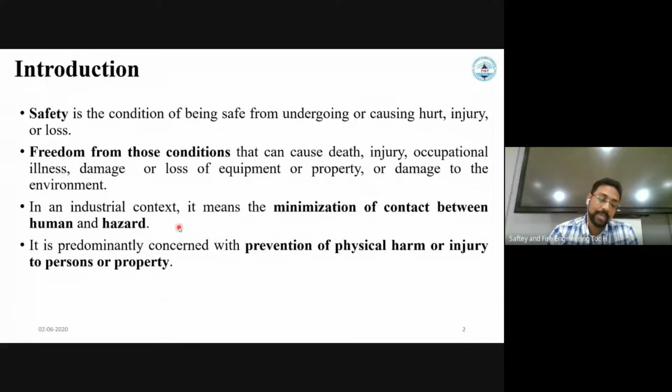We can go to the history of safety. The history of safety is very old. We have an Indian origin. Our Vedas, especially Ramayana, Mahabharata, Kautilya's Arthashastra, provide valuable advice on industrial matters. Especially the basic concept of safety for human protection was explained in the Rigveda.

It is written here, Puman Pumamsu Paripadu Vishwat. It is a Sanskrit phrase. The meaning is, let man protect man everywhere in the world. It is also said, Dharmo Rakshati Rakshitah. It is also Sanskrit. The meaning is, Dharma, a divine force to govern all people by self-discipline, will protect those who protect themselves.

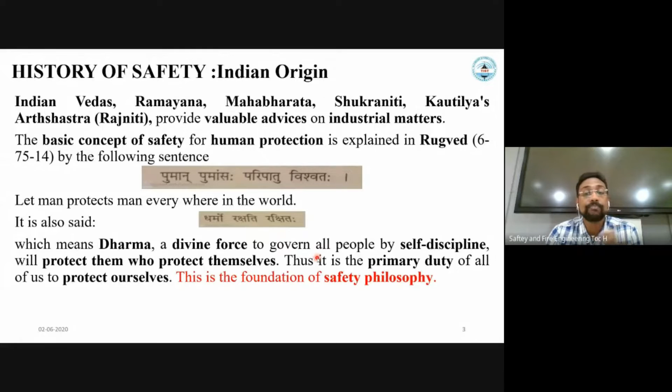So this is the primary duty of all of us, to protect ourselves. As human beings, we have to take care of all people, all fellow beings. Fellow beings we have to protect. This is the foundation of safety philosophy.

Now, one Upanishad says, Sarve Bhavantu Sukhinah Sarve Santu Niramayah Sarve Bhadrani Pashyantu Ma Kashchid Duhkhabhag Bhavet. The meaning is, let all be happy and healthy. Let all achieve welfare and no one get unhappiness.

You know, the happiest country in the world, according to the United Nations Human Development Index, is Finland. If you take the HDI ranking, Finland, Denmark, Norway, Iceland, Netherlands, Switzerland, Sweden, New Zealand, Austria, Australia, these are the countries ranked up to 10th or 15th in the HDI ranking. These are the countries where the people are very happy.

What are the factors which affect the happiness of the people? The standard of living is one factor. Environmental pollution is a factor. Education is another factor. And a safe working place and safe environment is another factor. So happiness cannot be achieved without safety and good health. So it is of prime importance. Therefore, the above Sanskrit stanza speaks about safety, health, and welfare of all, which is also the modern concept of all safety law.

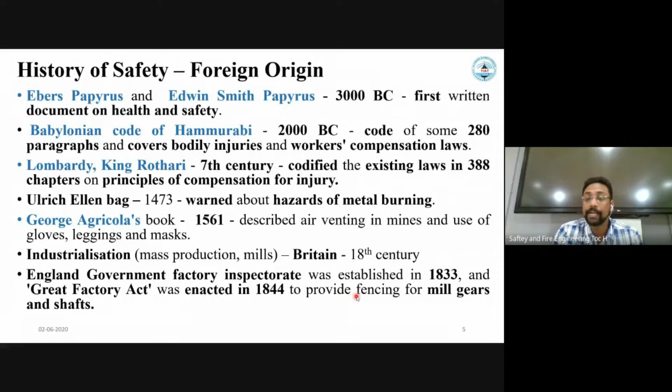And we know industrialization in Great Britain happened in the 18th century. That is actually the beginning of the safety culture, safety law, and safety inspectorate. The England government factory inspectorate was established in 1833. After so many industries started, more accidents happened. So people gave more importance to safety to protect people, the environment, and the health of people. The Great Factory Act was enacted in 1844 to provide fencing for mill gears and shafts.

Again, George Stephenson, known for the steam locomotive, suggested the use of the steam whistle for locomotives. He contributed this in 1833. And the National Board of Fire Underwriters was organized in 1866. In 1900, the first safety periodical, named Safety Engineering, was published.

In 1913, the Safety Council was founded in the USA. In 1914, during the First World War, the first Safety of Life at Sea convention was held in London. And later on, in 1919, the ILO was established, at Geneva in 1921. Later on, the ILO contributed a lot to safety.

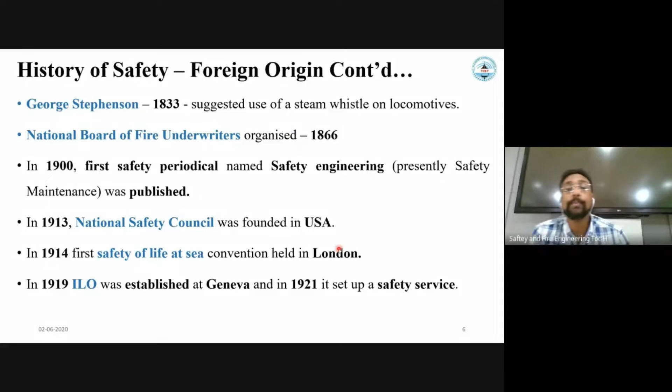Now we'll come to industrial accidents. What are the major industrial accidents that happened in the world?

The International Labour Organization estimates 2.3 million women and men around the world succumb to work-related accidents or diseases every year, with around 6,000 deaths every single day. It's not a small number, it's a big number worldwide. There were around 340 million occupational accidents and 160 million victims of work-related illness annually.

You can see the picture. These are some of the worst industrial disasters ever to happen in the world. From these disasters we learned a lot about safety. When an accident happens, everybody thinks about safety - oh, if safety was there, this accident could have been avoided.

The first one is the Oppau explosion, which occurred in 1921 when a tower of around 4,500 tons of a mixture of ammonium sulfate and ammonium nitrate fertilizer exploded at a plant owned by BASF. BASF is one of the largest petrochemical companies now, also one of the largest in Germany. That explosion killed around 600 people and more than 2,000 were injured.

Now come to the Rana Plaza explosion. That was in Dhaka, Bangladesh, in 2013. An 8-story commercial building called Rana Plaza collapsed. Total deaths were around 1,200 people, with approximately 2,500 injured. It was considered the deadliest structural failure accident in modern human history, and the deadliest garment factory disaster in history.

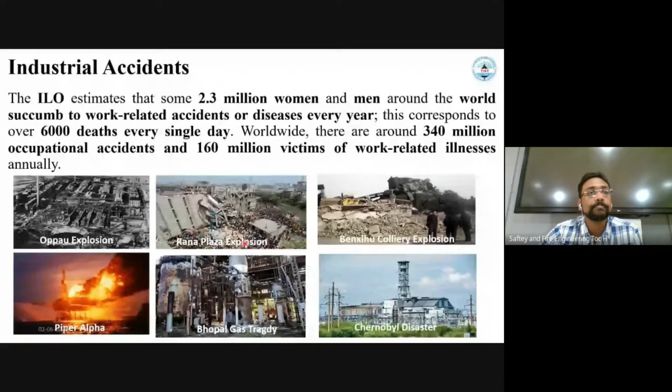Now we'll see some other industrial disasters I have not listed, especially the Flixborough disaster, Seveso disaster, Texas City refinery explosion, Three Mile Island, Jaipur oil disaster, and recently in India, the Visakhapatnam LG Polymers chemical plant gas leakage at Venkatapuram. These are other eye-opening incidents or accidents that happened.

Now we'll familiarize ourselves with some safety terms. What do you mean by accident? We never want there to be an accident. It is an undesired, unplanned event which may cause personal injury, damage to property or equipment, or loss of output, or all of this. That is called an accident.

What do you mean by injury? Injury is nothing but bodily hurt sustained as a result of an accident. A near miss is a warning sign. A simple example: if you are crossing a road and a truck is just about to hit you but you escape, that is called a near miss. Near misses are forms of accidents which could result in injury or loss, but do not.

Hazard is a very important term in safety. Hazard means an existing unsafe condition or action, or a situation or event, or their combination, which has the potential to cause an accident. The hazard can become a cause for an accident. Let me give a simple example to help you understand hazard.

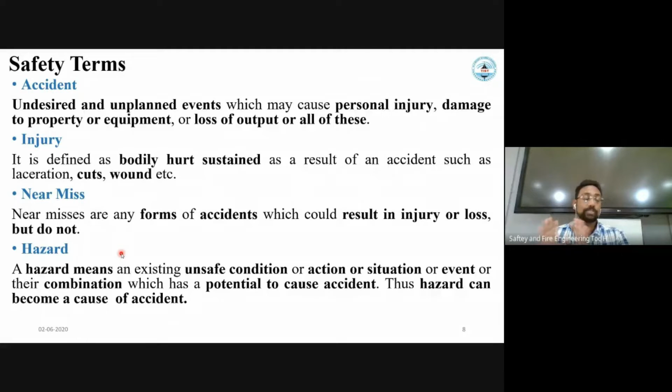The storage tank contains tons of inflammable gas, liquids, or toxic gases. That should not come out and create an accident. There lies the role of a safety professional. Like a poisonous snake coming out of the box and biting you causing death, a poisonous, toxic, flammable, or inflammable liquid or gas should not come out from the industrial premises. That is the purpose of safety.

Now we come to another term: unsafe acts.

Unsafe act is an act that deviates generally from the recognized manner. We have a standard operating procedure, and if somebody deviates from that, we can say it is an unsafe act. Examples include standing under a suspended load, improper lifting, starting a machine without authority, use of alcohol, or servicing equipment in motion.

Unsafe condition is another term. This is the existence of a mechanical, physical, chemical or environmental condition or situation that causes a hazard and accident. An unsafe condition is a slippery floor, an oily surface, rough surfaces or sharp edges, inadequate lighting, glare, inadequate ventilation, inadequate warning systems, high noise, or vibration.

Now this is risk, a very important term in the safety area. Risk is a combination of probability of occurrence and severity. Probability of occurrence is the frequency — how often an accident happens: once a year, twice a year, 5 times a year, 10 times a year, or maybe once in 5 years. How frequently an accident happens, that is the probability.

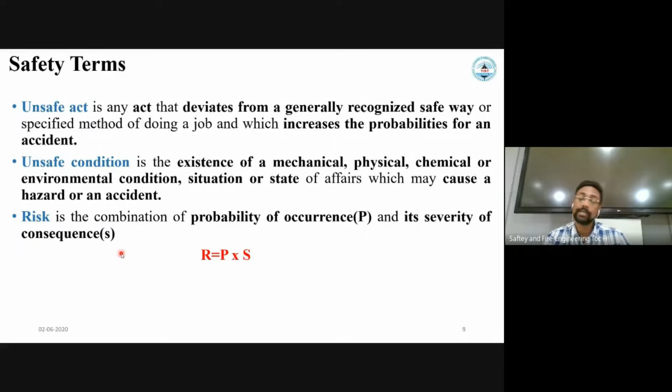Severity of consequence is how many people died, how many got fatal injuries, how many got affected by that accident. So that is severity. Risk is nothing but a combination of probability and severity.

Now we come to why we want to implement safety. What is the connection between safety and productivity? All industries in underdeveloped countries were not giving much importance to safety or to human life. But developed and developing countries give much importance to safety because it is part of the legislation, part of the law.

If an industry has good safety, employees will be highly motivated. They will have confidence that their managing director or owner is giving them good personal protective equipment like gloves and masks, good ventilation, good lighting, and good facilities. Automatically, the people will have a tendency to work hard, thinking 'my owner is providing me all facilities, why don't I work?' So the productivity will increase.

If safety devices are not incorporated and an accident happens, executives will not get more time to concentrate on productive activities. What is their job when an accident happens? They have to go for compensation, hospitalize people, settle insurance, and so many other things. They will never get time to concentrate on productive activities.

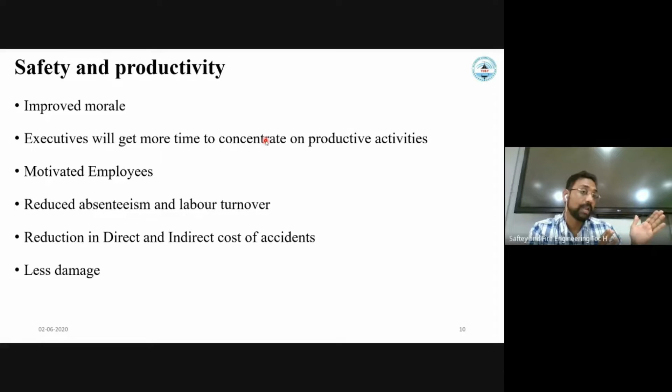So 10 lakhs we can spend for safety. You can at least save so many lives. What are the causes for accidents?

When an accident happens, so many people try to find the reason and blame somebody. People who are working in the safety field might have a feeling that if an accident happens, everything will be under the head of the safety department or safety professionals. If anything good happens, so many million hours accident-free in industry, so many people will come and take the credit. If anything wrong happens, this person will be the culprit. So this culture has to be changed.

What will be the major reasons for an accident? The first reason is taking the shortcut. If you take the disasters, Chernobyl disaster, Bhopal tragedy, all that, they were taking the shortcuts. They were not following the standard operating procedure. So taking shortcuts without going for the standard procedures, bypassing something, will be the major reason for causing an accident. Being overconfident, we have seen in Chernobyl,

what is his name? Dyatlov. Comrade Dyatlov, the senior engineer there in the control room, was ordering his subordinates to raise the power. When they refused to raise the power: I have 25 years of experience. I am saying, raise the power. What was the reason he ordered like that? Because he was overconfident. He might have done so many things unsafely and nothing happened, but the next time you will be the victim. So overconfidence is another problem.

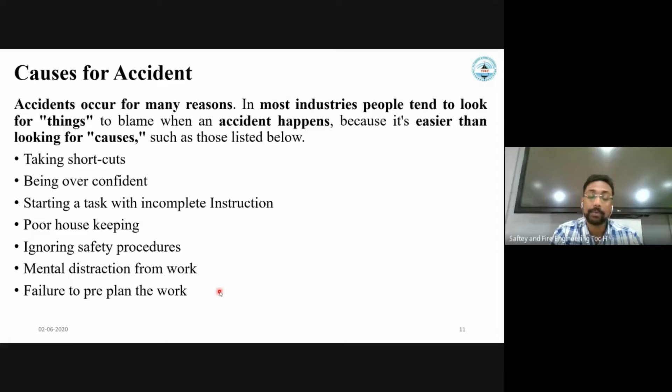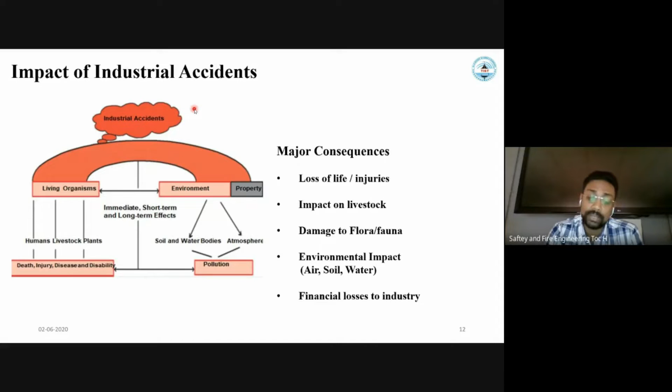Now, what is the impact of industrial accidents? You can see the impacts in Chernobyl itself. The environment is polluted. So many people died. Damaged flora and fauna, air, soil, water, everything polluted, and financial losses to industry. These are the impacts of industrial accidents.

We come to a famous theory called accident causation theory, introduced by H.W. Heinrich. He is considered the father of safety. And he evolved a theory called domino theory. He observed around 330 incidents. Of the 330 incidents, 300 resulted in a near miss, no injury, just escaped. 29 resulted in minor injury, and only one resulted in a fatality or major injury or life loss.

From this, he analyzed that injury is because of an accident. An accident happens because of an unsafe act or unsafe condition. An unsafe act or unsafe condition is because of a fault of a person, carelessness. And carelessness is because of the social environment and ancestry, the situation where he was born and brought up.

A simple example: take an undeveloped country where rules and regulations are not stringent, for example, sorry, Bangladesh. Please excuse me if anybody is from Bangladesh or some African countries; their rules and regulations are not up to the mark. Take a developed country where the rules and regulations are up to the mark, Germany or France. Imagine at 6 o'clock early morning somebody is riding a motor vehicle. At a junction there is a red signal, countdown 60, 59, and so on. There is no vehicle.

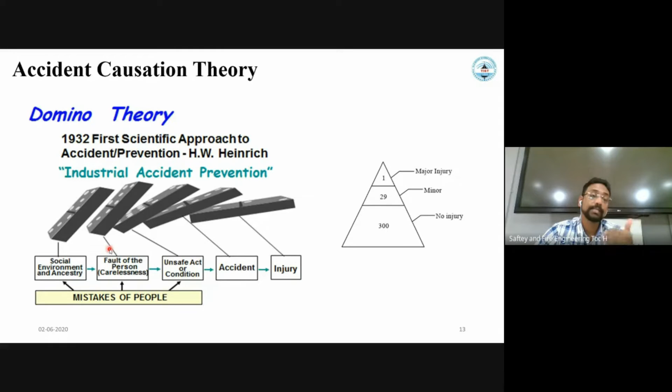So in that context, many theories have contributed to behavior-based safety. We can study industrial psychology, the behavior of a person, and by changing the behavior slowly, we can avoid so many unsafe acts, and we can avoid accidents. The major industrial hazards are fire, explosion, and toxic gas release. In fire itself, we have jet fire, pool fire, flash fire, and BLEVE.

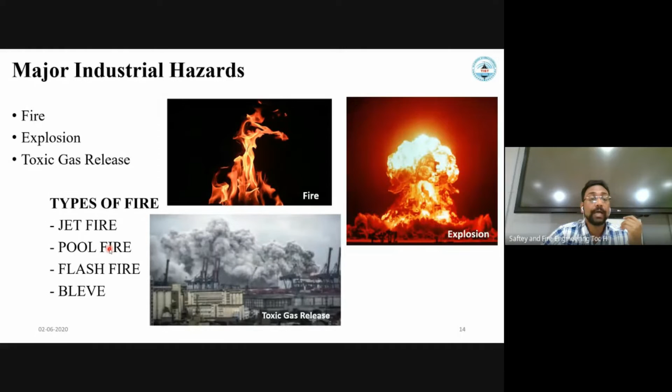What do you mean by jet fire? You can see in the picture. A jet fire is a specific type of fire that occurs when a high velocity fuel leaks from a pipeline or from a tank and gets ignited immediately. It results from a high pressure release of gas through a limited size of opening from a pipe, flange, valve, or tank. The parameters that can influence the flame shape are wind speed, the material properties, and the atmospheric conditions. All these things affect the jet fire.

If you consider the pool fire, you can see it in the picture. This is also a common type of fire which can occur in the form of a tank fire or from a pool of fuel spread over ground or water. Suppose a ship containing crude oil or any type of inflammable liquid leaks into water, it forms a pool, and it catches fire. We can say it is a pool fire.

We have different pool fire modeling, using the TNO model. We can estimate the radiative flux, heat radiation, and heat release rate. All these things we can find out by using different pool fire models. And the heat depends upon the pool diameter. If pool diameter increases, the heat also increases.

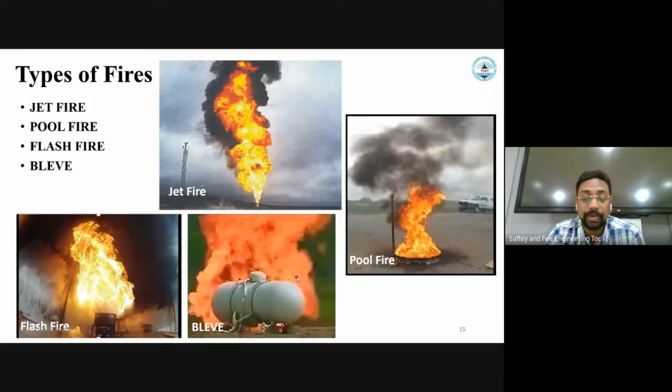The sudden containment failure allows a superheated liquid to flash, and it increases its volume over 200 times. This is sufficient to generate a pressure wave and fragments, and a fireball may happen. So these are the types of fires, and we can model the fire by using different types of modeling.

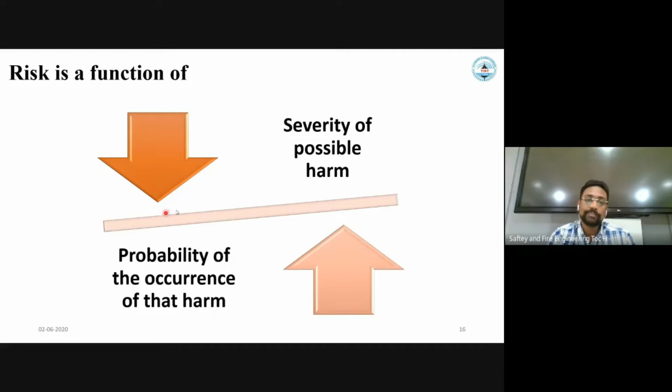Now we come to an important point, risk. As we have discussed, risk is nothing but a combination of probability and severity. How to reduce the risk? We have to assess the risk, then we have to reduce the risk. That we are going to see. So this is a function of probability and severity. And if we see the risk assessment,

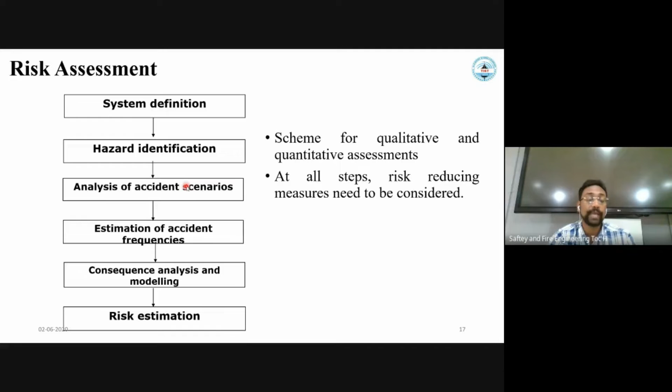first we have to identify the hazard, and then the scenarios which lead to an accident. Then we have to estimate the accident frequency, how frequently the accident happens: once in a year, twice in a year, like that. Then we have to go for a consequence analysis, and we can estimate the risk.

Now, for hazard identification, different tools can be used. The commonly used tool is HAZOP, hazard and operability study. Checklists can be used, what-if analysis can be used, task analysis can be used, and Dow, an American company, introduced the fire, explosion and toxicity index, FETI. These are the hazard identification techniques.

Hazard identification and risk assessment techniques can be classified into two categories, qualitative and quantitative techniques. That we will explain in some other webinar; that is also a detailed topic. After the hazard is identified, we have to go for risk assessment. Risk assessment techniques are fault tree analysis, event tree, bow tie, barrier diagram, reliability data, human reliability, consequence model. These can be used for assessing the risk.

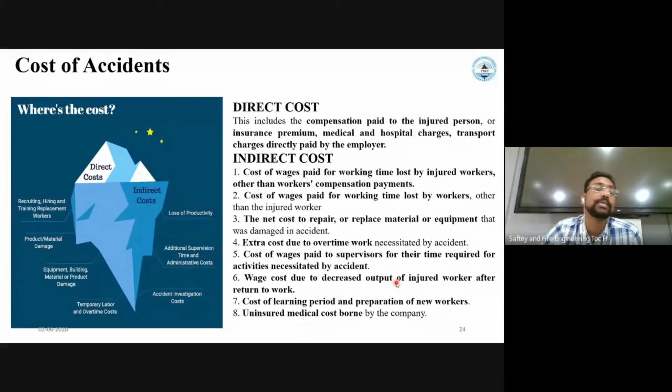The next cost, repair or replace the material or equipment. A particular machine may be damaged. You have to replace it. Extra cost due to overtime work necessitated by an accident. Cost of wages paid to supervisors. Wage cost due to decreased output of the injured worker. And cost of learning period and preparation of new workers. Uninsured medical costs. All these things come under the indirect cost. So we have to reduce all these things by preventing an accident.

Now we come to the legal aspect of HSE. In India, the Indian Factories Act, we can say, is the heart or brain of all laws to ensure safety. Indian Factories Act 1948. The first amendment came in 1987 after the Bhopal tragedy. A new chapter, Chapter 4A, hazardous material management, was added after the Bhopal tragedy. So you can imagine the impact of an accident or disaster.

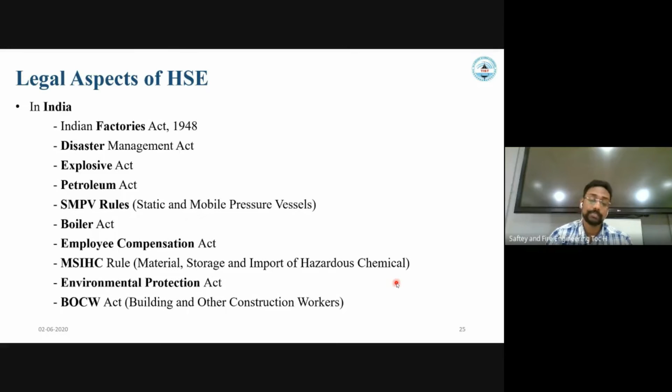So the Indian Factories Act, the Disaster Management Act, Explosives Act, Petroleum Act, SMPV rules, Boiler Act, Employee Compensation Act, MSIHC, Manufacture, Storage and Import of Hazardous Chemical rules, Environmental Protection Act, BOCW Act, that is Building and Other Construction Workers Act. These are the main acts in India.

And what is the responsibility of a safety officer? If you want to become a safety professional, what is the job you have to do? The safety officer's first job is to implement the OHS, Occupational Health and Safety, policy and programs. Carry out JSA. JSA is nothing but job safety analysis. We have to find out the reason for an accident. If a particular accident is repeatedly happening, we can conduct a JSA. We split the sequence of operation into small pieces and analyze them separately. Thereby, we can find out the reason.

Then organize workshops, seminars, campaigns, competitions, all those things. Then advise the purchase department to ensure high quality PPE. I have seen in one place a helmet broken by an object falling from the top. If the quality of the helmet is not good, then what is the purpose of wearing a helmet? So we have to advise the purchase department to ensure quality of PPE, carry out plant safety inspection, carry out accident investigations.

Why are accident investigations conducted? Accident investigations are conducted not to blame anybody. The principal purpose of accident investigation is to find out the cause. Why do we want to find the cause? Similar accidents can be avoided if we find the cause, and we can take precautionary actions. Conduct risk assessment, promote setting up of a safety committee, that is very important. Check if all employees are acting in adherence with the rules and regulations.

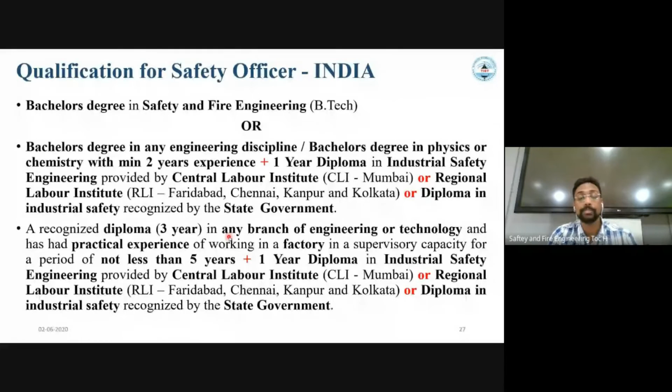Then he can be designated as a statutory safety officer. He can be designated, or a 3-year diploma plus 5-year experience plus this 1-year diploma provided by all these institutions can also be a safety officer.

Now, what are the international certifications? We always talk about NEBOSH. What is NEBOSH? NEBOSH is nothing but the National Examination Board for Occupational Safety and Health. It is from the UK. You can easily complete a NEBOSH IGC. NEBOSH is providing general and international general certificates in occupational health and safety, and they are providing fire safety and risk management, construction health and safety.

The NEBOSH HSE certificate in process safety management is also there, and the international technical certificate in oil and gas operational safety, certificate in environment management, diploma or international diploma in occupational health and safety and environment management. And NEBOSH offers a master's degree also in collaboration with the University of Hull, MSc in occupational health and safety, environment management, and all.

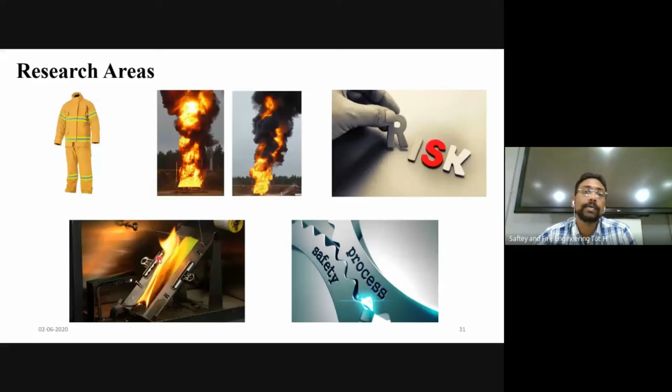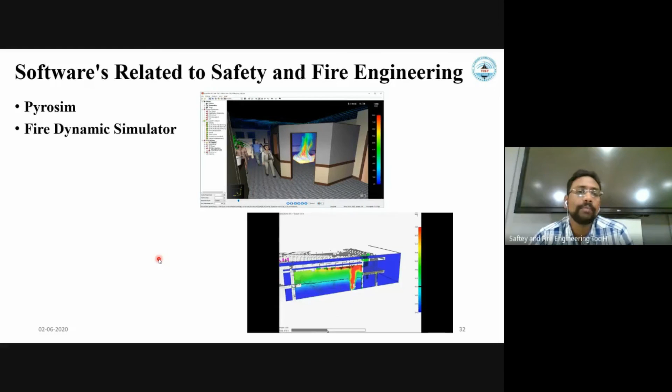The softwares related to safety and fire engineering are Pyrosim and Fire Dynamic Simulator. Pyrosim is a leading software that accurately works with FDS models. Pyrosim is a graphical user interface for fire dynamics, and we can find out HRR, peak HRR, convective flow currents, radiation flow, conduction heat flows, thermocouple temperature flows, all these things.

FDS, Fire Dynamic Simulator, is a fire-driven fluid flow computer program that solves numerically a large eddy simulation form of the Navier-Stokes equation, appropriate for low speed thermally driven flow with an emphasis on smoke and heat transport from fires, to describe the evolution of fire. The FDS software is developed by the National Institute of Standards and Technology in cooperation with the VTT Technical Research Center.

And there is also ALOHA and PHAST software. ALOHA stands for Areal Locations of Hazardous Atmosphere. We can find out the dispersion of gas using ALOHA and PHAST. Based on wind direction, we can find out the concentration of gas at a point, up to a safe distance.